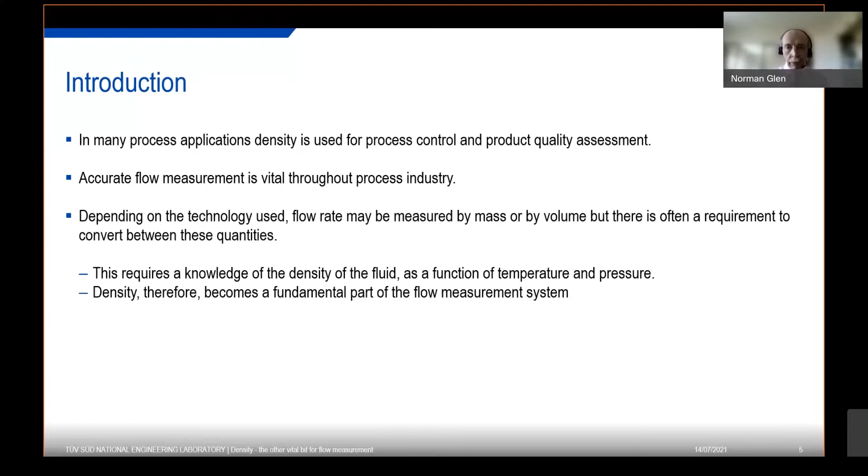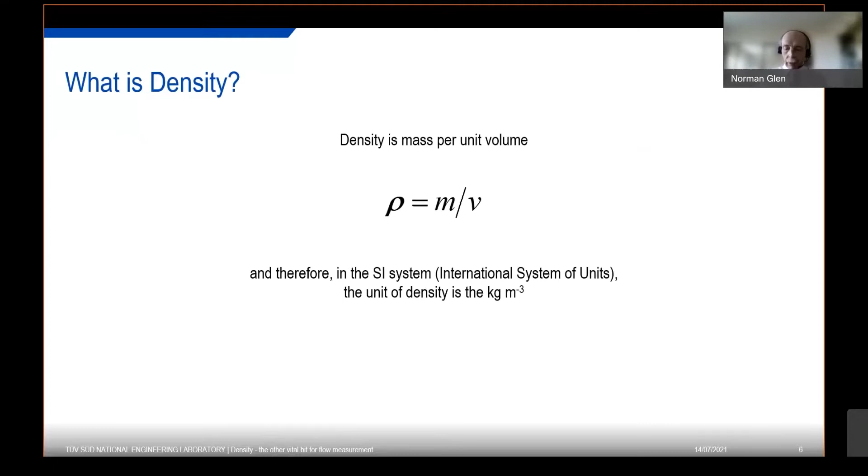You'll also see other types of density units measured frequently, particularly in the oil industry and in certain other applications, food and drink sector. Sometimes you'll see relative density or specific gravity. Specific gravity is usually oil related. Relative density - these are a density divided by the density of a reference, and the reference is at stated conditions. For liquids, the reference is often water at 1 bar and 4 Celsius. For air, for gases, it's often air at 1 bar, but at 0 Celsius.

And it's important to note that relative density is not a ratio of densities. A density ratio is the ratio of the density of the fluid at temperature and pressure to the density of the same fluid at reference conditions.

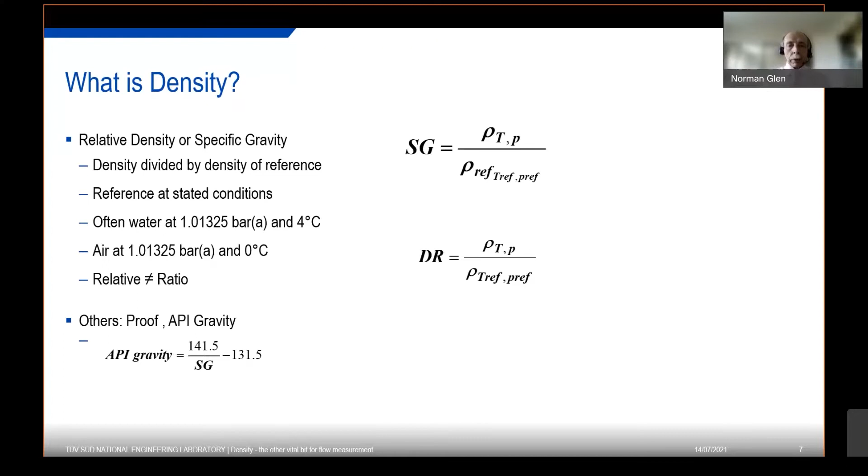So that's density, that's what density is. That's all well and good. How do we actually go about measuring the density of a fluid? So what I'm going to do over the next few slides is to have a look at a range of density measurement techniques, some of which are applicable to both gases and liquids, some of which are only applicable to liquids. And we'll look at the advantages and disadvantages of each of these techniques.

Before getting into the detail of techniques, it's worth doing a first split on them, saying we can think of them in two categories. We can think of offline methods, where we take a sample from the fluid, gas or liquid, and measure it separately in an offline device. Alternatively, there are online or inline methods, which may be either insertion or flow-through techniques, where the measurement is made effectively in the fluid that you're interested in.

That also leads us on to the question of calibration of all of these devices, either the offline methods or the online or inline methods, in particular if they are forming part of measurement systems, the other parts of which also require calibration.

So how do we measure density? The primary standard for flow, for example, is effectively a bucket and a stopwatch - a bit more sophisticated than that. The facilities at NEL have very, very low uncertainties, but the principle is that you have a vessel and you fill it with the fluid that you're interested in. You either weigh the vessel empty and filled, so you have a mass and a time, or you measure the change in volume of the liquid in the vessel, so you have a volume. So you can have a mass or a volumetric primary flow measurement.

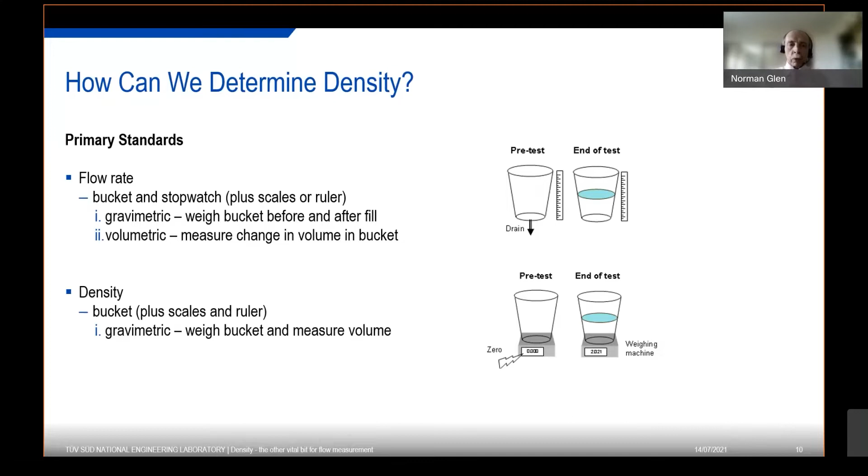In terms of the techniques that are available, I'm going to cover 5 techniques here, some of which are applicable to both gases and liquids, others of which are only applicable to liquids.

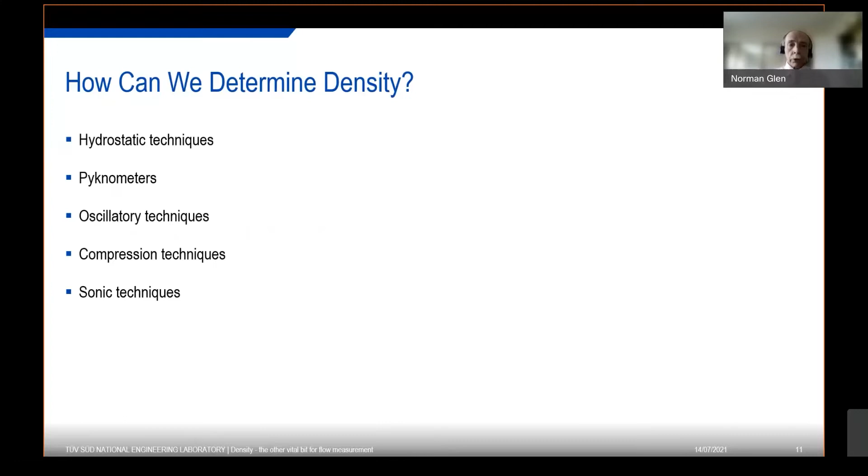Hydrostatic techniques are pretty close to what I was saying in terms of primary standard, in the sense that we are determining the apparent weight of a body of known mass and density totally submerged in the fluid whose density we want to measure - Archimedes' principle.

These can be broken down into broadly 3 implementations of the technique. A mechanical suspension system, where the body in the fluid is connected to a balance using a fine wire. Instead of the wire, you can have a magnetically coupled system, where you have a magnet and an electromagnet coupling the body to the balance. Or you can use a magnetic float system, where the body in the fluid is held in equilibrium by an electromagnetic field, and by controlling and measuring the field, you can effectively measure the apparent mass of the body in the fluid.

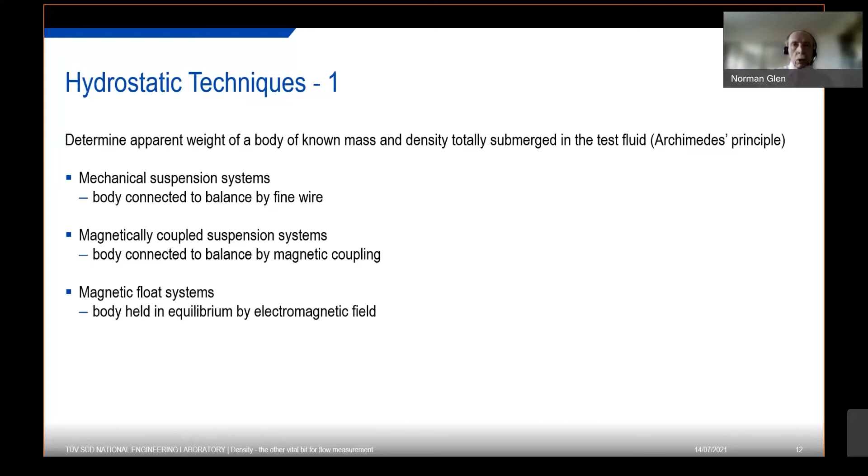What would one of these look like? Here's an example of a magnetically coupled system. We have our body immersed in the fluid, the sinker - quartz glass in this case - and a coupling system which transmits its apparent weight in the fluid through the wall of the enclosure to a balance.

The equation is very simple at its most basic: the density is given by the difference between the true vacuum weight of the body and its apparent weight in the fluid, divided by the volume of the body. In practice, you have to apply second-order corrections, but in principle it is that simple a technique, and therefore very close to the primary method for determining density.

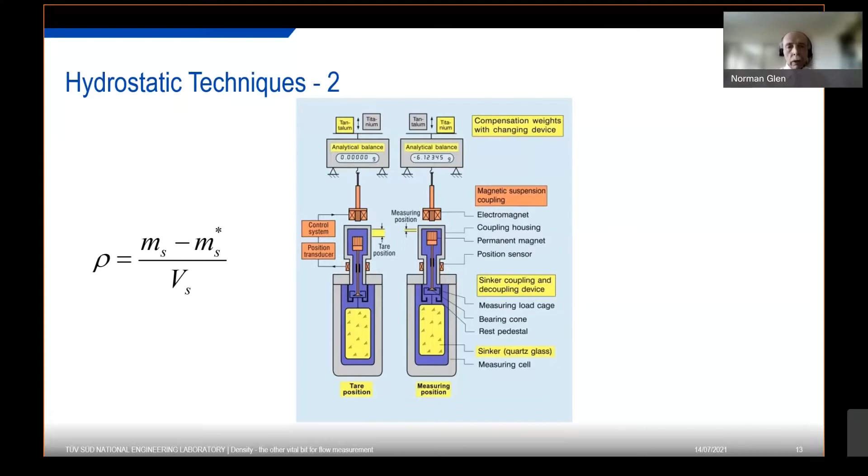Hydrostatic techniques have a number of advantages. Depending on the design and implementation, they can be automated, and they can be used over a wide temperature and pressure range. For example, the system we looked at in the previous slide has the whole system inside a pressure vessel, inside a thermostat, so you can work across an extended temperature and pressure range. And they can be very accurate - 0.02, or perhaps even better over limited ranges to 0.005. So they are essentially a primary standard method, and depending on the implementation, if it's a closed vessel arrangement, they can be used for gases and liquids.

Obviously, there are disadvantages. If you want to achieve those sort of uncertainties down at the 0.005% level, it needs careful design and careful operation. If it's not automated, then it's time-consuming to use to get to that level of performance. Conversely, automating it often means it's quite expensive, and they're really not suitable for online use - these are laboratory, near-primary-standard type devices.

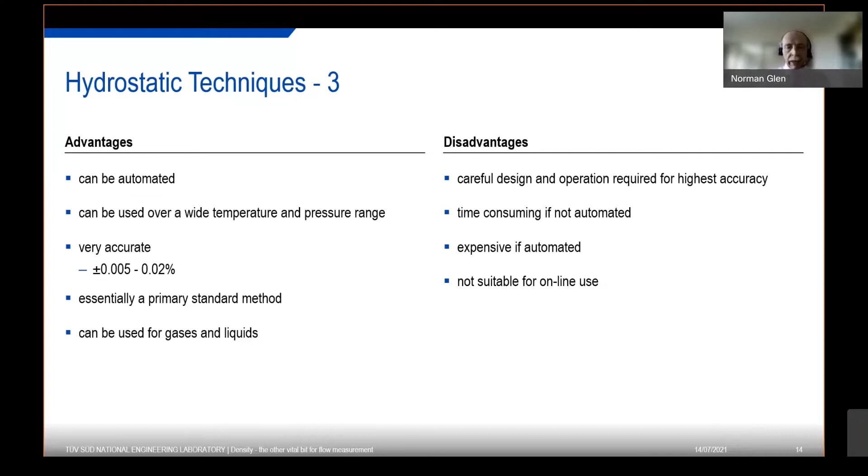Going to the other extreme, pyknometers measure the mass of a known volume of fluid. Again, we've got the two quantities we need to know for density: mass and volume. And again, there are various implementations of these.

We've got capillary stoppered pyknometers, where you compare masses of equal volumes of sample and water. Graduated bicapillary pyknometers, which are calibrated using water and have a scale that you read. Or pressure pyknometers, again often calibrated using water. The pressure pyknometer is essentially the closed vessel, pressure capable version of the capillary stoppered pyknometer.

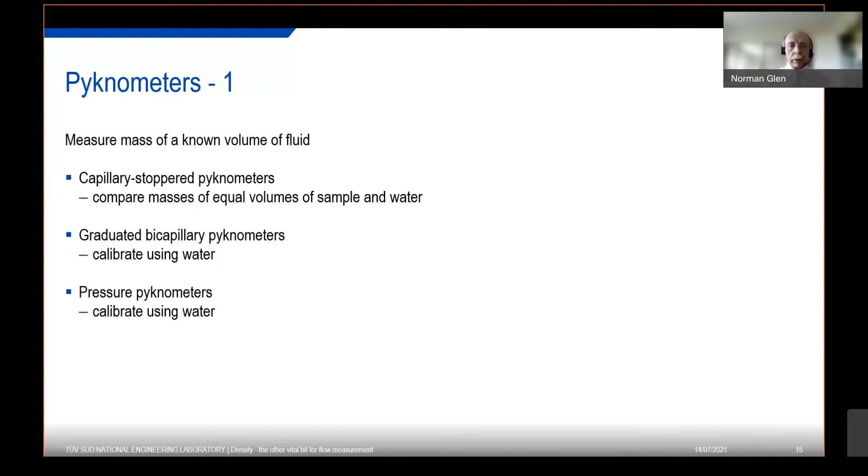So the capillary stoppered pyknometer on the left is a small glass vessel with a plug lid which has a capillary through it, hence the name. You fill the vessel, insert the stopper, and the capillary allows the fluid to flow over the top to a defined level. You can then weigh that with your reference fluid, water. Then you repeat with the fluid whose density you need to know. So you've measured two masses, you know the density of the reference mass, the water, and you can therefore calculate the density of your fluid of interest.

Graduated bicapillary pyknometers, as I mentioned, have a scale, again calibrated with water. For a pressure pyknometer, you would weigh the pyknometer empty and then fill it with the fluid, which may be a liquid or a gas, and then weigh again. So again, you have two measurements of a known reference, water, usually.

You get a theme here. Water is coming up as the reference fluid in a lot of these situations, even when we're potentially measuring other fluids. The reason is that we know the density of water very accurately across a very wide range of temperature and pressure conditions, so it makes a very good reference fluid from that point of view. It has one or two other problems, particularly things like capillary effects, and also getting it back out of vessels can be quite difficult, but it has that very well characterized density as a function of temperature and pressure that we need for a reference fluid.

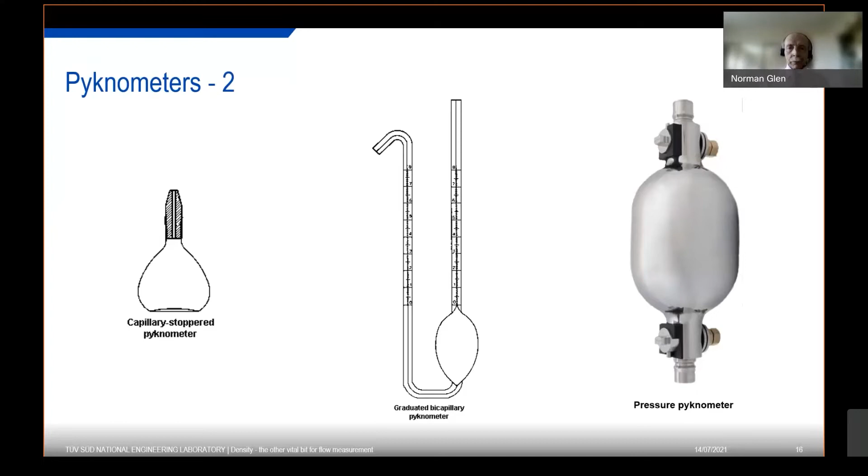Pyknometers are fairly fundamental. They are very simple devices, and therefore they tend to be fairly cheap to purchase. They can provide what I would class as good to reasonably high accuracy, possibly even down to 0.01%. Depending on the design, they can be used for gases as well as liquids if it's a pressure pyknometer. But to achieve those sort of levels, to get down below 0.1%, does require careful operation, and generally, if that's manual, it comes down to having a very skilled operator.

Also, if you're trying to do that, it tends to be time consuming if it's not automated. Again, like the hydrostatic techniques, they can be automated, but that obviously increases the cost, so you lose the advantage of them being cheap to purchase. And they're not suitable for online use. Pressure pyknometers are a hybrid in that you are taking a sample off and then measuring post the measurement, so it's not an online technique in that sense.

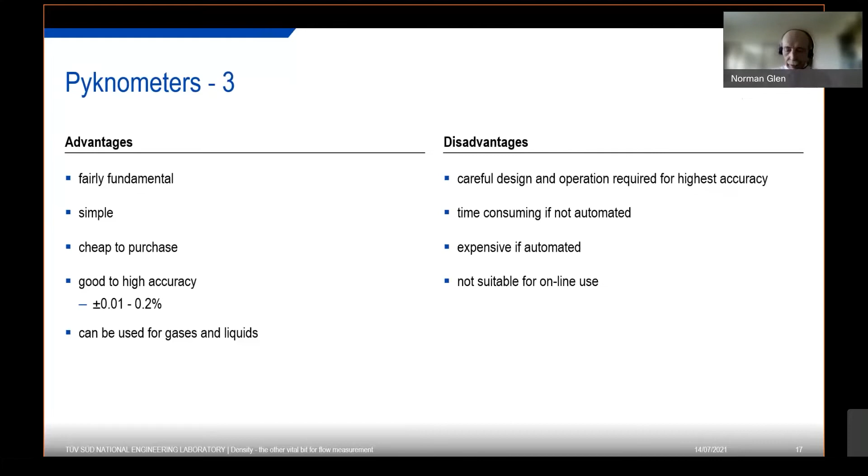So what can we use if we need to measure online? Well, oscillatory techniques are probably the most widely used way of doing online density measurement. There you measure the oscillation period of a body, either immersed in the fluid or filled with the fluid. If filled with the fluid, it would be a vibrating tube where you measure the typically transverse oscillation period of the tube. That changes as a function of the density of the fluid, because you're effectively changing the mass of the vibrating tube and fluid.

Or you can have an insertion type where you have a rod or a tuning fork immersed in the fluid, but again, in this case, the period of oscillation will also change as the density of the fluid changes.

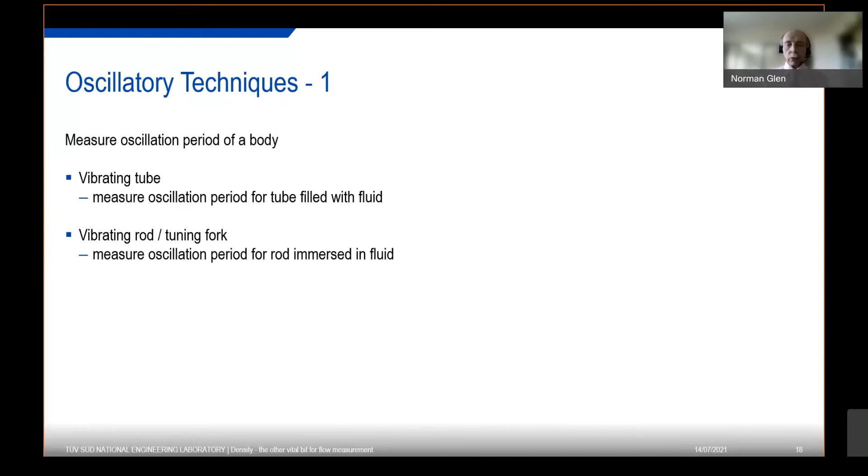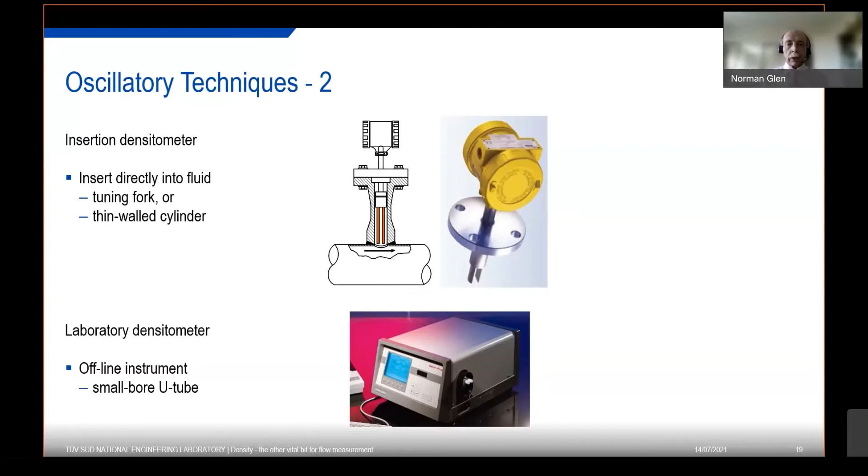Insertion densitometers can be used for liquids or gases and are either inserted directly into the fluid or perhaps in a side stream or in a pocket, as shown here. As I've mentioned, they would either be a tuning fork design, such as the one on the top right there, or a thin-walled cylinder. Laboratory instruments most commonly tend to be small bore U-tube, but the principle is exactly the same: you're measuring the period of oscillation, which will change as a function of the density of the fluid.

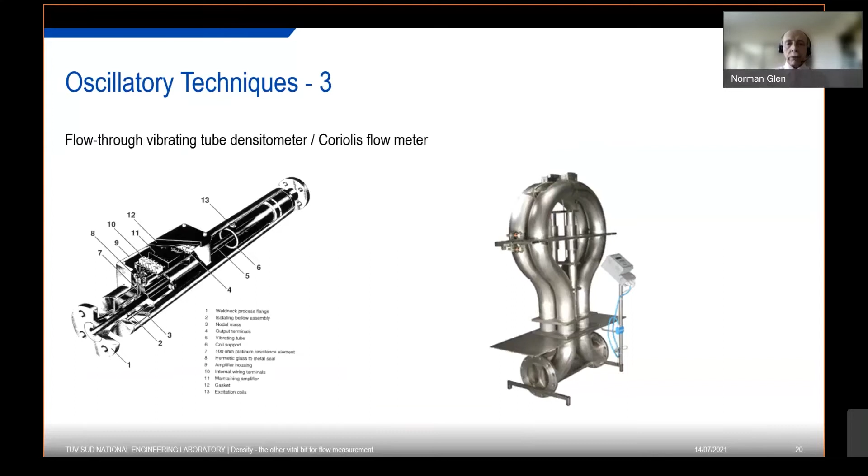Flow-through devices are either dedicated flow-through vibrating tube densitometers or Coriolis meters. All modern Coriolis meters have density as their secondary output, so you get a measurement of mass flow and also density. But again, it's the variation of the period of oscillation with the density.

Oscillatory techniques do have a number of advantages. In principle, they are simple and easily automated. Depending on the design, they can be used over wide ranges of temperatures and pressures, up to very high pressures, down to very low temperatures. And they can be used in line, which is really their big advantage for process and measurement system applications. They are commercially available in a whole variety of formats to suit different requirements. They can potentially be very accurate, certainly easily better than 0.1 down to 0.02 for certain types and applications, and depending on the design, they can be used for both gases and liquids.

All of that comes with some disadvantages, the most obvious being they tend to be more expensive than things like pyknometers. But you get all of those advantages, particularly the online or inline use. However, they do require careful calibration, if you're going to try to achieve those low uncertainties in use.

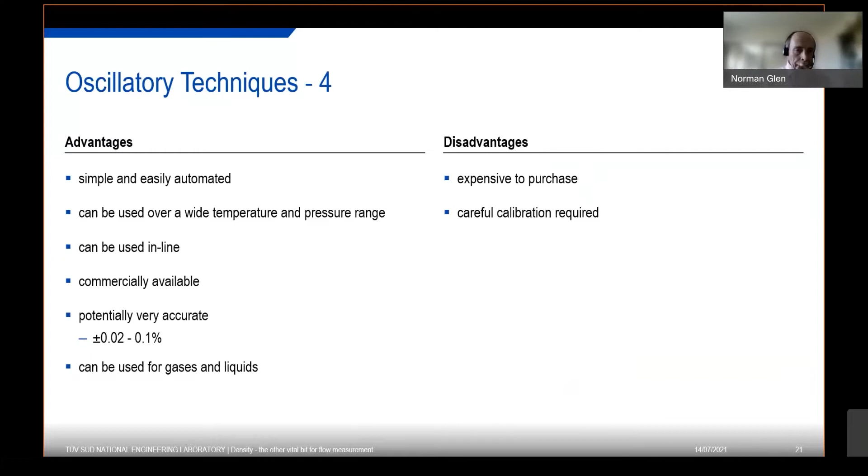A couple of other techniques to look at: compression techniques, where we measure the change in length of the fluid. That can be done in a number of ways. It can be a capillary rise, where you measure the change of height of a liquid in a capillary tube - only applicable to liquids. Or you can use piston displacement, where you measure the displacement or change in position of a piston in a pressure vessel, which you can apply to liquids at pressure.

Similarly, a sealed bellows approach, where you fill a bellows with the fluid whose density you want to know. You know the mass of the fluid, and you can measure the change in length as a function of pressure or temperature. So these techniques are only suitable for liquids.

Sonic techniques measure the speed of sound in a fluid. You can either use an interferometer with a variable path length, which detects the impedance of the vibrating crystal as a function of the speed of sound, or an optical diffraction technique, which measures the diffraction of a light beam through the density variations caused by the sound wave. There is a fundamental thermodynamic relationship between density and speed of sound, so you're measuring speed of sound but can relate that to density. These techniques can be used for gases and liquids.

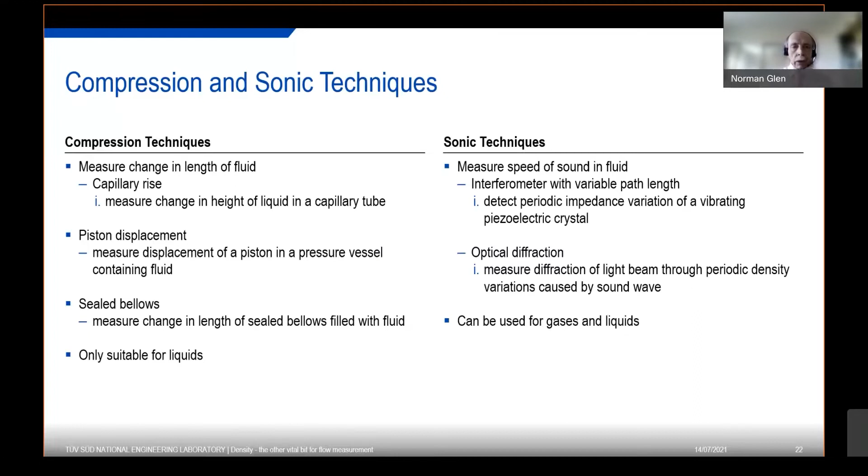So we've seen a range of techniques which can be used to measure the density of gases and liquids. For general lab and process applications, oscillatory techniques are the most widely used and the ones you're most likely to come across as a user. The other techniques, particularly hydrostatic weighing techniques, tend to be the preserve of primary standards laboratories or research groups.

It's also worth pointing out that although I mentioned some of these systems can be fairly expensive, while that implies high accuracy will generally mean high cost for the equipment, the converse is not necessarily true. Simply because a device has low accuracy doesn't necessarily mean it has low cost. It might just not be a good implementation, or even the appropriate method for the system you're interested in.

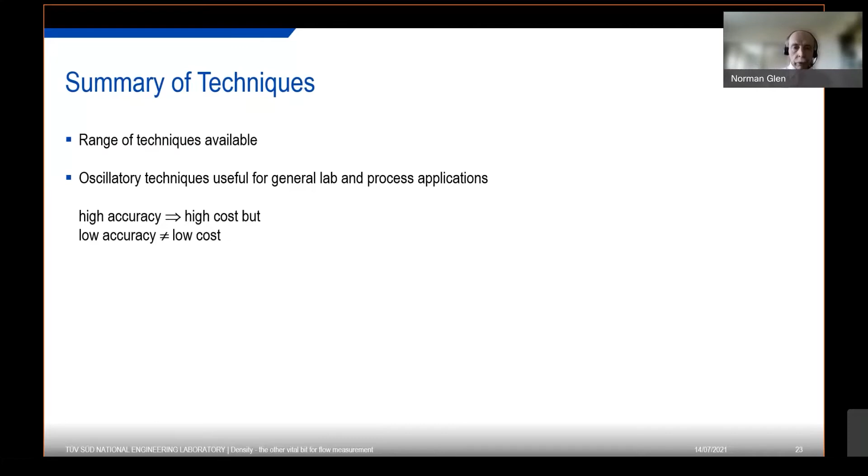I mentioned earlier that particularly for online or inline densitometers forming part of a measurement system, calibration is important, because recalibration at appropriate intervals is vital for maintaining traceability. These calibration requirements are often driven by regulations. Equally, the calibrations must be fit for purpose, and I'll explain more about what I mean by that as we go through this section.

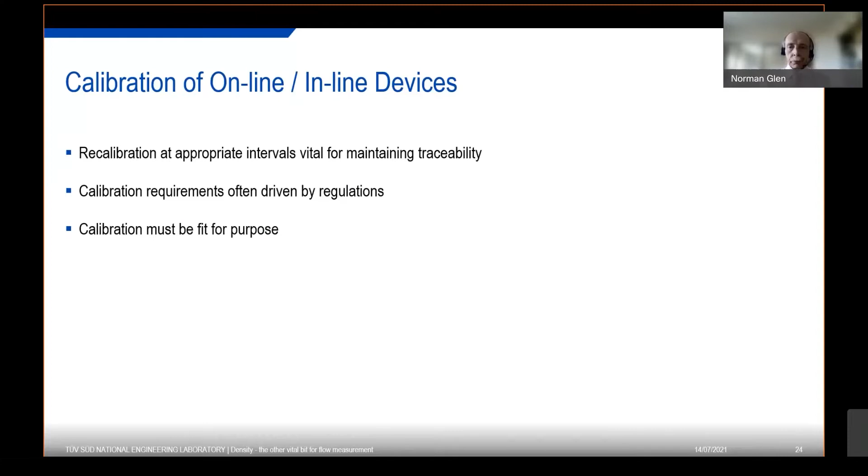As I said, the requirements are often driven by legislation. In the UK, for liquid measurement systems for petroleum, the requirements from the OGA, the Oil and Gas Authority, specify an uncertainty of 0.25% by dry mass of the quantity exported into common transportation systems like pipelines.

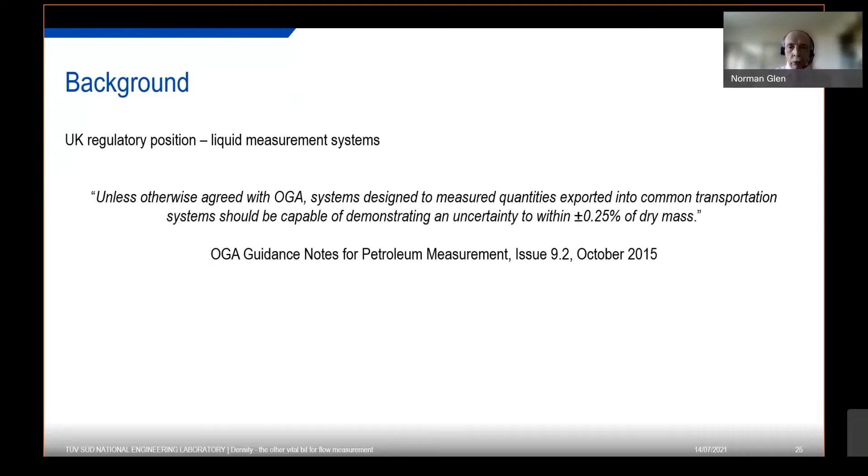Now, although it is changing, a significant number of liquid measurement systems in the North Sea still make use of volumetric flow meters. The original installations used turbine flow meters because they were the best available at the time, and they're volumetric. But you have to report your production by mass, and allocation in shared transportation systems is also by mass. So fluid density is required to convert from the volumetric output of the flow meter to the mass required by the regulator or pipeline.

The most commonly used technique are vibrating tube densitometers. But if they're forming part of the measurement system to achieve that 0.25% specified by OGA, traceable calibration of the densitometers as well as the flow meters is therefore also required.

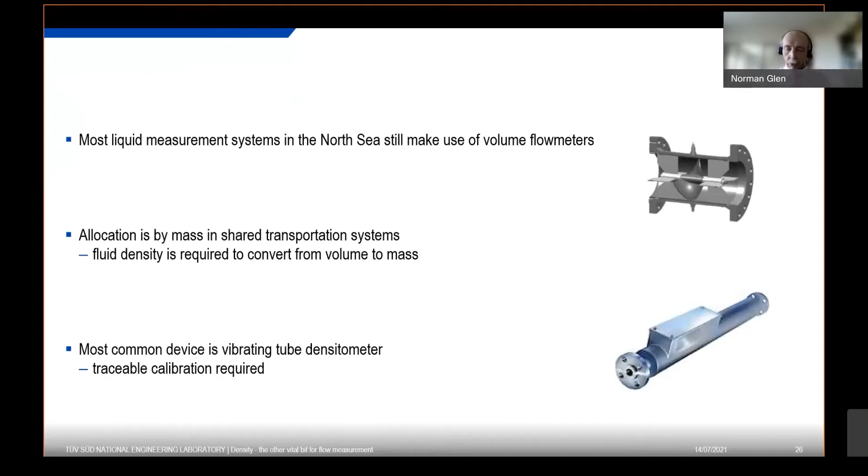Fit for purpose. Well, let's take a step back.

The previous approach in this area was that the manufacturer would undertake an initial calibration of the densitometer, typically at ambient conditions, i.e. 20 Celsius and 1 bar, and then derive corrections for other temperatures by making measurements at 1 bar at other temperatures, and pressure corrections by making measurements at other pressures at 20 degrees, but not simultaneously.

Recalibrations, particularly if done by third-party laboratories, were typically only done at 20 degrees and 1 bar, assuming that none of the pressure or temperature coefficient effects had changed. But of course, densitometers are used at non-ambient conditions, and the equation used for the most common ones is cross-coupled in the period, the output of the densitometer, the temperature, and the pressure.

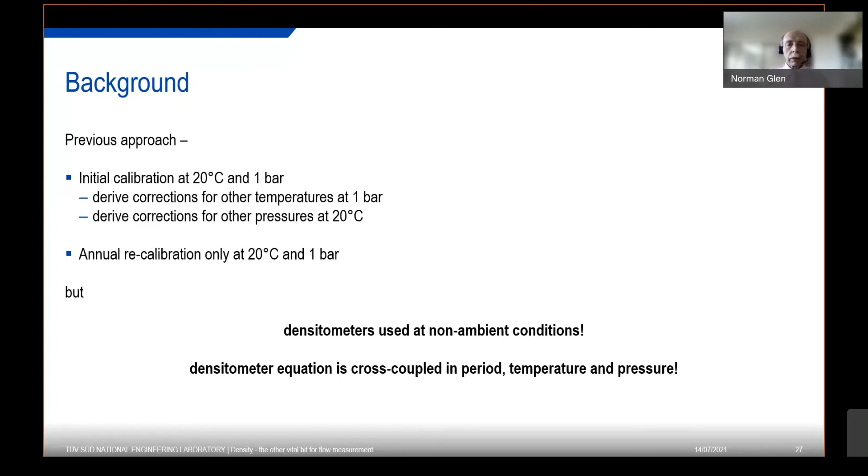This led to some concerns about the appropriateness, the fitness for purpose, of the previous calibration approach. As a result, NEL led a joint industry project to examine the effects of temperature and pressure cross-coupling on liquid densitometers for the UK sector of the North Sea.

Following that, OGA, as it is now, changed its guidance and requires densitometers to be calibrated at their anticipated operating conditions, i.e. simultaneously at temperature and pressure, so ensuring the calibration is fit for purpose.

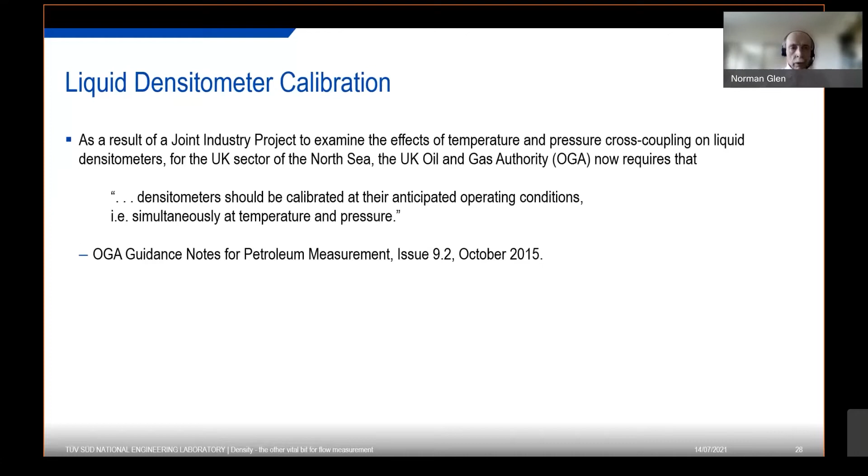So how do you calibrate a densitometer? Well, again, like all of these things, in principle it's simple. You use fluids of accurately known density. The fluids, of course, have to cover the full operational density range that the device will see in service. The fluids probably also have to cover other relevant parameters, in particular viscosity and speed of sound, since these are admittedly second-order effects on oscillatory densitometers.

And the fluid properties obviously must be known across the full temperature range and pressure range required, because the fluids are acting as your transfer standards.

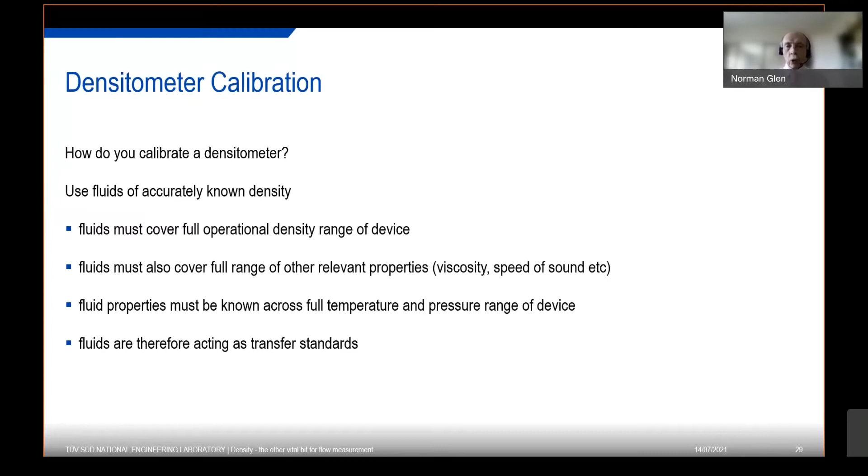So at the start of the JIP, we asked the sponsors, okay, what sort of range of conditions, in particular for density and viscosity, do we need to cover for the North Sea? You can see here that the full range went down to about 530 odd kilograms per cubic meter, which will be condensate type applications, up to almost 1200 kilogram per cubic meter, so high viscosity heavy oil, and corresponding viscosity ranges from centipoise or below up into the 40 plus centipoise for the high viscosity oils.

But the most common range was a much smaller subset of that. So what we tried to do was find reference fluids which would basically bracket that common range.

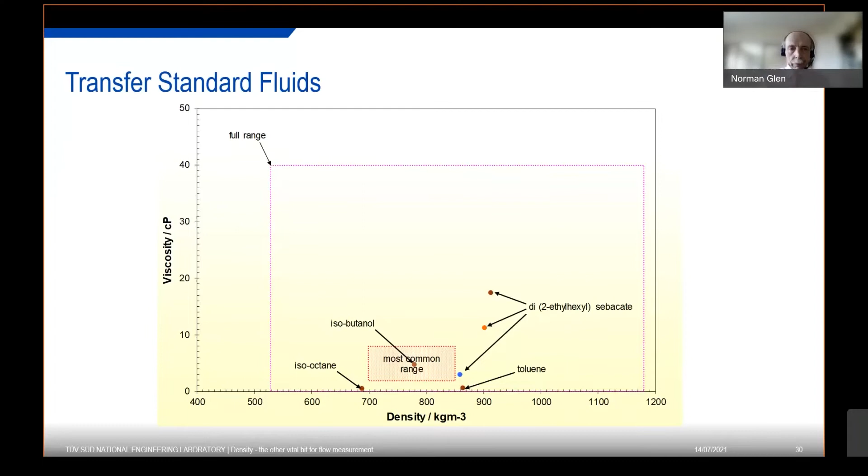Once we had identified fluids, we then had to determine their density as a function of temperature and pressure across the required range. To do that, we used the NEL primary liquid densitometer. This is the one we saw earlier. It's a single sinker magnetic suspension densitometer. We've seen that equation before, based on Archimedes' buoyancy principle.

Our particular implementation can achieve an expanded uncertainty of better than 0.015% at 95% confidence across the temperature range from -40 up to 150 at pressures up to 300 bar. Across more limited temperature and pressure ranges, the uncertainty is 0.01% or slightly lower.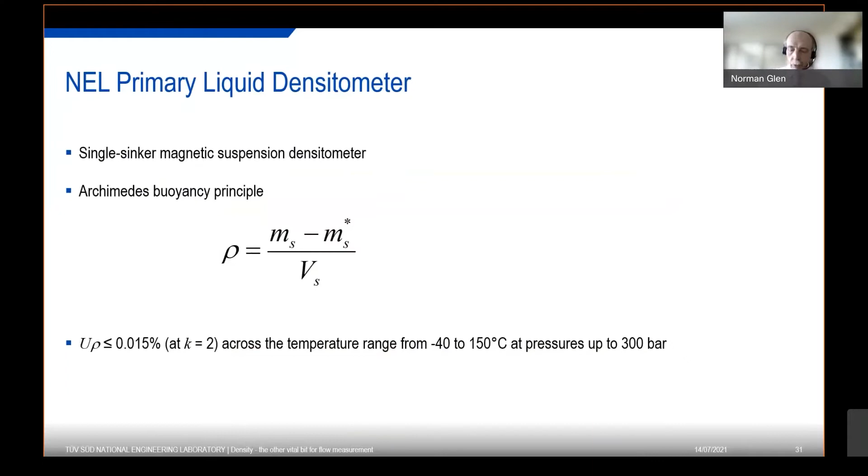Here we can see it in a bit more detail. Previously we just saw the little bit showing the sinker in its measuring cell. That's a pressure vessel, which in turn is sitting inside a thermostated vessel. So we can control both the temperature and the pressure of the fluid that we're interested in measuring the density of by measuring the apparent weight of the sinker. And the apparent weight of the sinker is read by the analytical balance, coupled through the wall of the pressure vessel by a magnetic suspension coupling system.

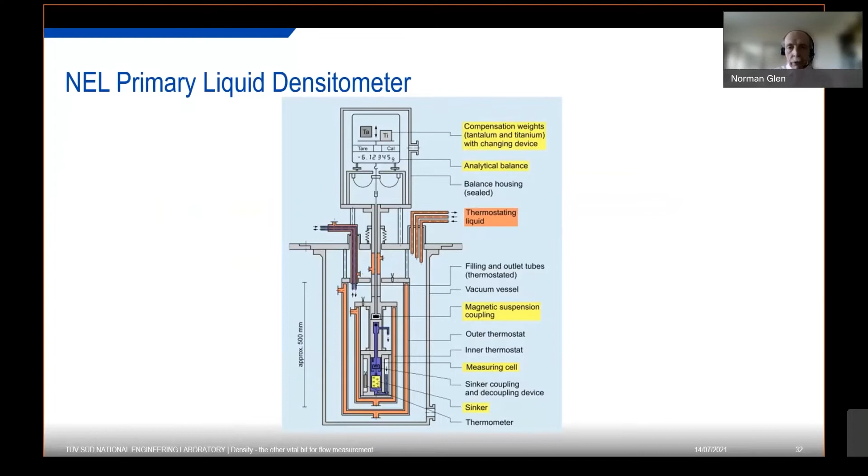That's all well and good. How does it perform? Here's three sets of data from measurements made using the system during the joint industry project. The measurements were made on three separate samples of reference fluid from different batches of the sample from the supplier. They were made across the period between August 2007 and September 2008, so quite a time difference between them.

I've just picked the data at 20 and 100 Celsius here as the extremes of the range. You can see that the agreement between the three sets of measurements is very good. It's generally within plus or minus 0.005% or better.

Okay, so the system's self-consistent, but we could have some bias in there that we haven't noticed. How do we deal with that? Well, by looking at measurements made by other people using other systems.

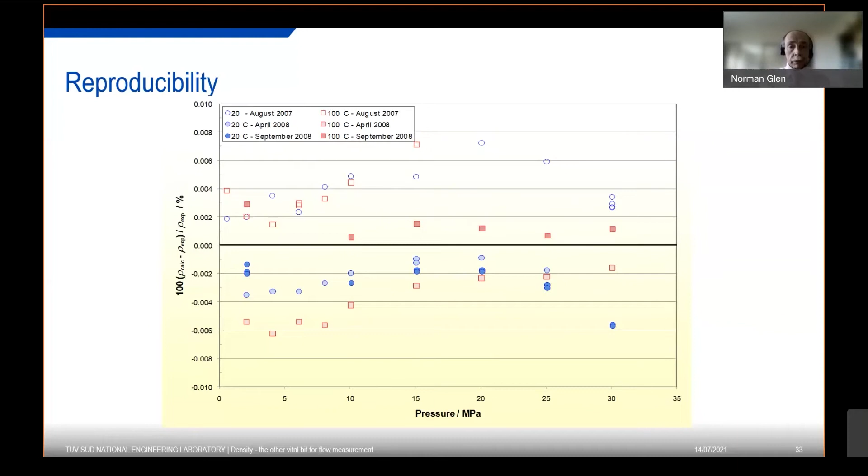Here's a couple of sets of data comparing measurements from PTB, the German standards body, and the corresponding US one, NIST, National Institute of Standards and Technology. You can see that the agreement between the NEL and PTB measurements looks very, very good, which possibly isn't surprising in one sense, in that both systems were of the same design.

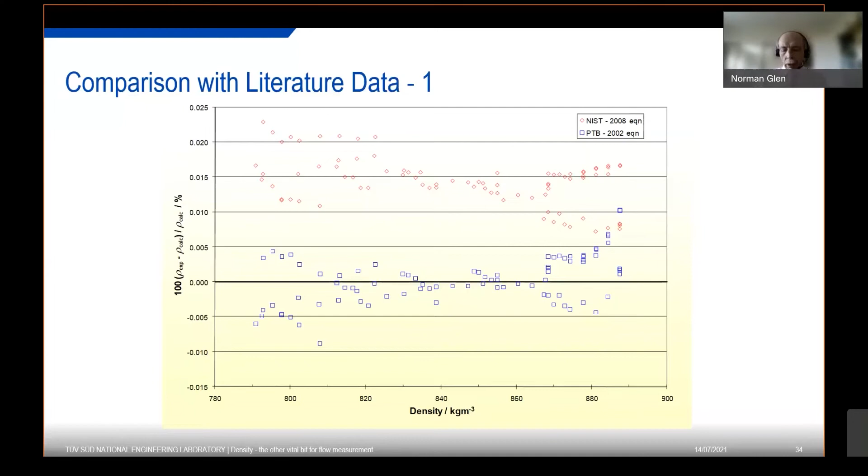The results, the comparison to the NIST data look a bit further off, and I was initially a little bit concerned about that. But when I looked in more detail at the NIST data, I found that those headline figures we looked at on the previous page actually consisted of 3 sets of measurements from NIST: one was their standard reference material, which is what they normally supply to customers; one was an air saturated sample; and one was degassed.

You can see that the difference is biggest for the air saturated and least for the degassed. Our system is effectively running degassed, so the measurements are close. We're generally within plus or minus 0.008%. There's a slight temperature effect, but much better than just the headline figure. So that gave us confidence that our reference measurements were good.

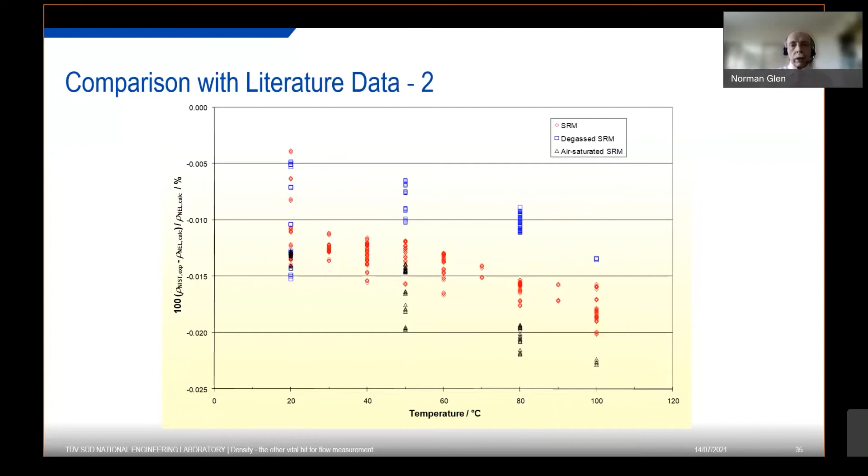That means we can move to the next stage: fill a densitometer with 2 or more of these fluids, control the temperature and pressure of the fluids, and measure the output period. How good do we have to control it?

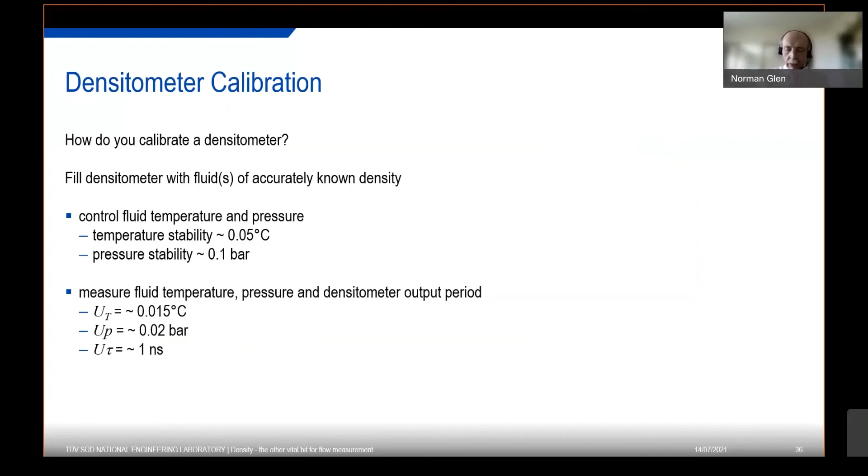Well, temperature stability about 50 millikelvin, pressure stability about 100 millibar. Then measure the temperature with an uncertainty of about 15 millikelvin, ideally, and measure the pressure with an uncertainty of about 20 millibar. Because of the temperature and pressure stability, the output period should be stable in the nanosecond type range, and measuring periods to that uncertainty is easy.

What does it look like in practice? Our system has an enclosure. The photo on the left shows a typical densitometer installed in the enclosure. The schematic on the right shows that we have a fan and a temperature control system below with which we can control the temperature of the air in the enclosure.

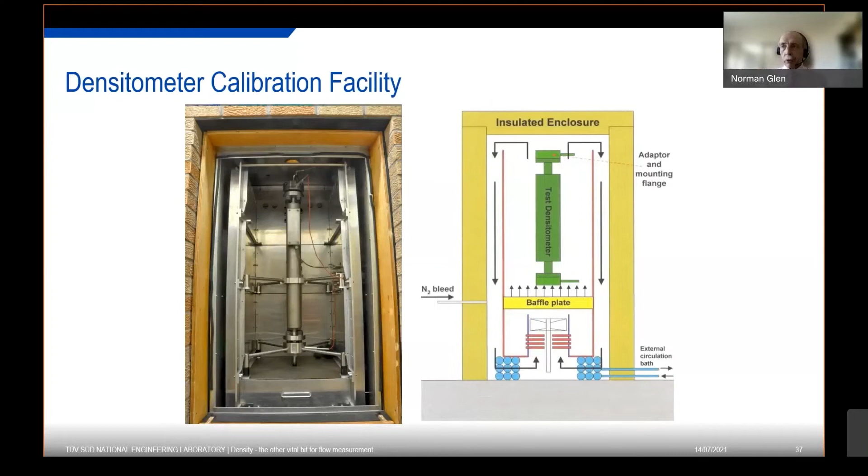Separately, we have a circulating loop whereby we can control the temperature of the fluid in the densitometer as it flows round. We need to control both the air temperature round the densitometer and the fluid temperature to achieve those low uncertainties in temperature that I mentioned earlier. If we didn't control the air temperature when running at high fluid temperatures, you would have an unacceptable temperature gradient across the densitometer.

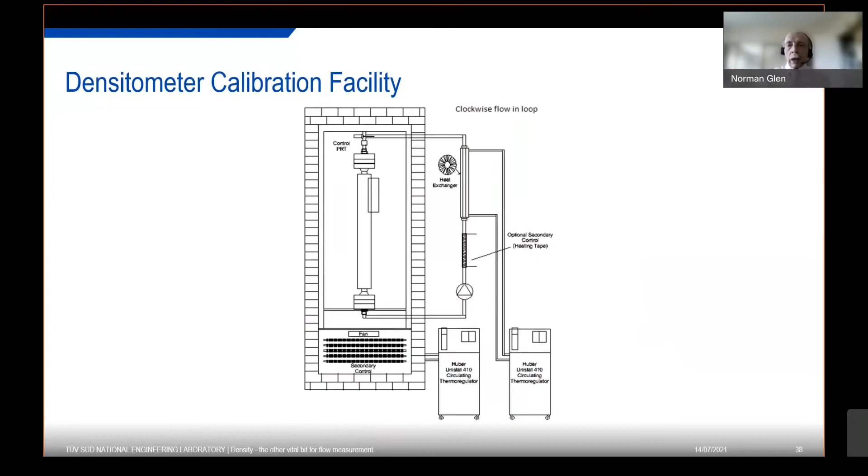Obviously, we can actually look at that in more detail and look at the uncertainties. Here's an example from our top level uncertainty budget for the facility. Just picked a set of conditions here: running with a fluid temperature of 90 Celsius at 90 bar gauge, 91 bar absolute.

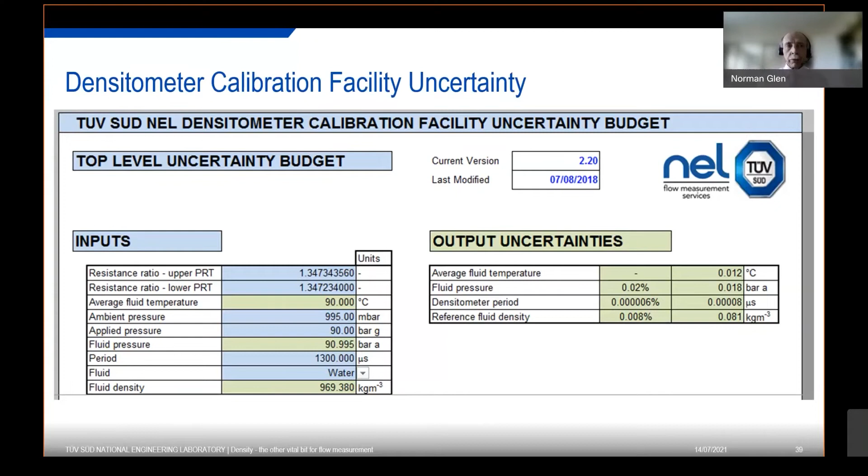You can see that on the basis of our measurement capabilities, we're achieving our targets. Our temperature uncertainty is 12 millikelvin, uncertainty in the pressure is 20 millibar. Densitometer period uncertainty is down in the fractions of a nanosecond, as I mentioned. And the reference fluid density is below 0.01% here. So we will have good confidence that we're seeing the performance of the instrument when we look at it.

Following on from the JIP, we started a calibration service, and since then we've calibrated almost 750 of the 7835 series densitometers, which are still the most commonly used type in the UK sector of the North Sea. These have been calibrated to the current OGA guidelines. Operating conditions for these units we've seen ranging from 5 Celsius up to 95 Celsius, and pressures from 5 bar or even lower, 3 bar, up to 130, 131 bar A.

Initially, what we found was that about half, so for about the first couple of years, about half of the units coming to us had as-found errors of between -0.1 and +0.1%. But just stating that headline figure kind of masks the scale of the problem, because whilst about 15% had negative errors more than -0.1, about half actually had positive errors over 0.1, i.e. a significant number were overreading by a significant amount. Over the years, that has reduced as the calibrations have improved to become more fit for purpose, from ourselves and from other calibration laboratories.

Interestingly, there was no clear correlation between the as-found error and operating temperature and pressure, which had been one of the things that had triggered the JIP in the first place. But what we also found was that just adjusting the base coefficients as per the previous procedure often wasn't good enough. Many of the units still had significant residual errors, so it was necessary to optimize more of the coefficients across a limited operating range to get down to the low uncertainties.

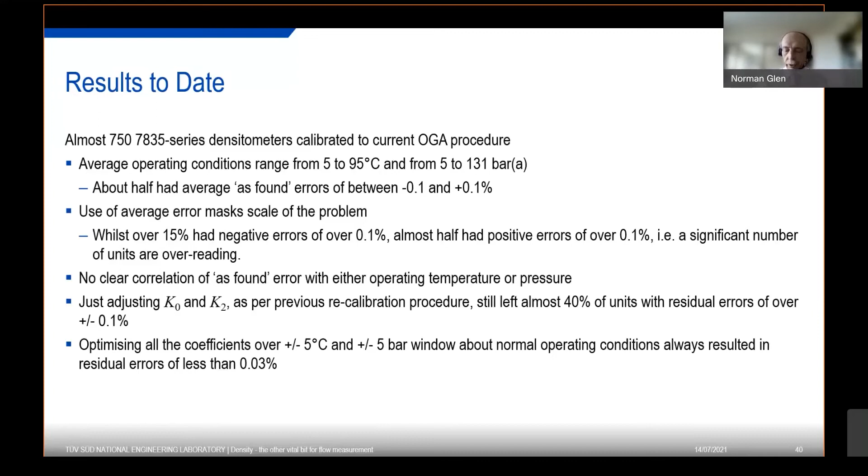Okay, so we've looked at measurement techniques, but in a kind of abstract way. What happens when you're actually doing it in practice? There are other considerations and other things that might affect the performance of your measurement system, even a well-calibrated one.

Potential sources of error would include non-representative samples, if you're actually taking a sample offline. If it's an inline or online system, if you have inhomogeneity of the sample in the sensor, gravitational settling perhaps of two fluids of very different density, solid deposition onto a sensor, an inline or online sensor, or conversely erosion, because deposition and erosion will alter the oscillating mass, which will therefore alter the apparent density. If it's a liquid we're looking at, if you've got gas breakout, then again that will cause a problem for the measurement.

Stress effects - these are oscillatory systems. If they are subject to stress, either in use, perhaps by an excessive pressure event, or stress when taken out of use by mishandling or damage, that will affect their pressure and temperature dependence. And if it's part of a measurement system, then temperature and pressure differences between the densitometer and the flow meter will also have an effect.

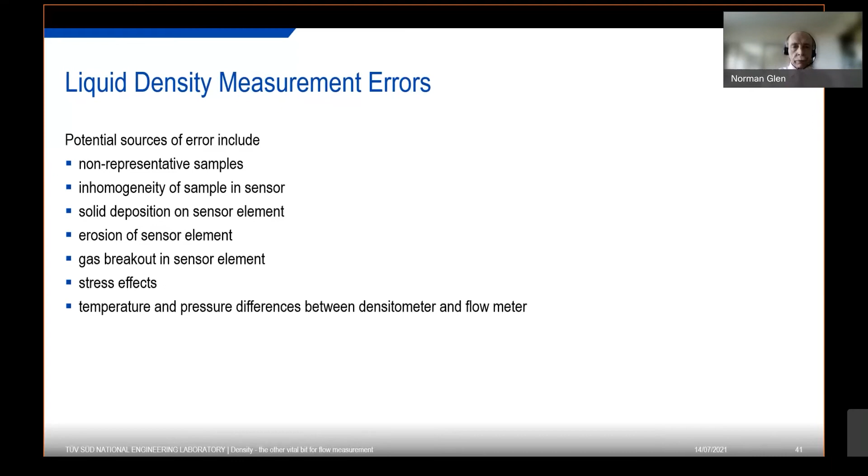So that's measurement. Let's have a quick look at calculation. Specifically, we're looking here in terms of the oil industry, because crude oil and petroleum products are typically sold by volume at reference conditions. The reference conditions are either 60 degrees Fahrenheit and 0 psi gauge for imperial, or 15 Celsius and 101.325 kPa for metric. So the effects of temperature and pressure on the fluid density are required to convert from the measured conditions to the reference conditions.

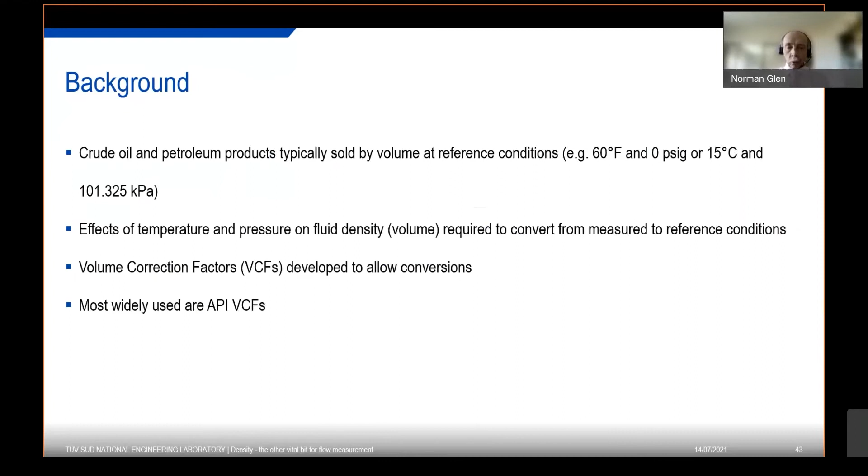This is usually done using things called volume correction factors, which have been developed to simplify that calculation. The most widely used are the ones developed by and maintained by the American Petroleum Institute, and they've got a fair history. The most widely recognized starting point were the 1952 Blue Book tables. They were then revised in 1980, and then again in 2004 as part of the Chapter 11 measurement series.

The 52 Blue Book was called the Blue Book for a very obvious reason - it had a blue cover, and it was actually a joint publication between the American Society for Testing of Materials and the UK Institute for Petroleum. Interestingly, although it was published in 1952, a lot of the data in it were based on crudes and fractions published in 1916, most of which were primarily from UK and US domestic production at that time.

The 1980 revision had some improvements, better base data in particular, and data handling in terms of the database. It covered just over 65% of worldwide production and about 68% of estimated reserves in 1974 - so a bit of a lag, but not as bad as between 1916 and the 52 Blue Book. Again, better handling of the data - the tables were replaced by equations, and there were also statistical studies carried out to check the data.

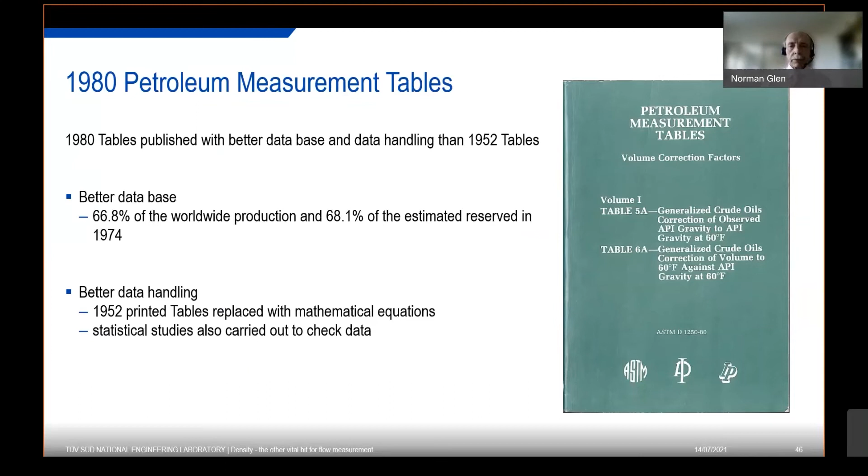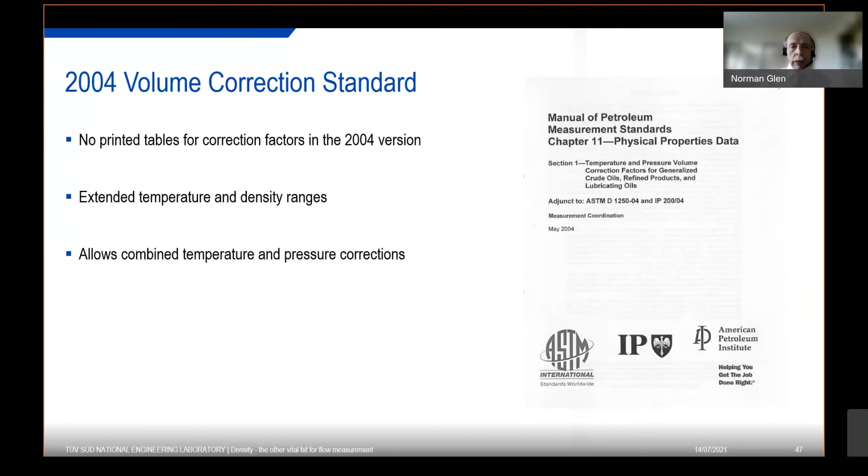The 2004 correction did away with the printed tables completely. It extended the temperature and density ranges and introduced the use of combined temperature and pressure corrections. And as I mentioned, they're widely used in trade applications, but they can also be used in things like provers, where you need to convert between a volume in a volumetric prover and mass if you're calibrating or proving a mass flow device.

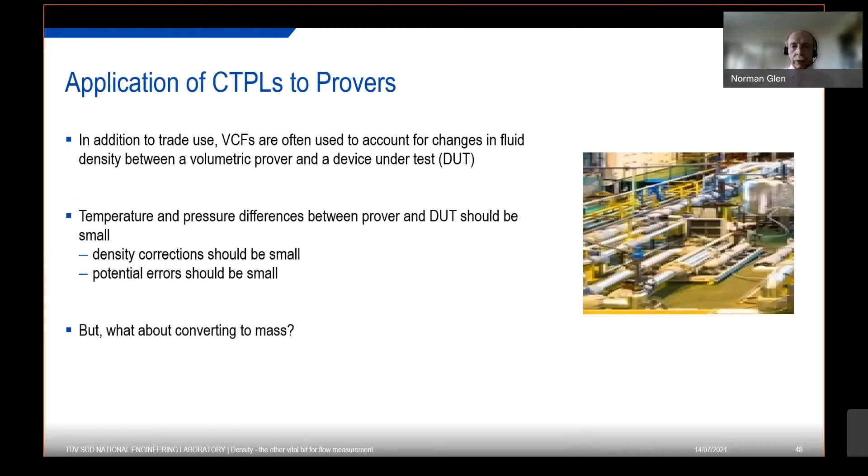So again, as I mentioned, for densitometers, you really want a small temperature and pressure difference between the prover and the device you're testing. But even if you achieve that, how do you convert from the volume from your volumetric prover to your mass? You do it using the conversion factors. So we've got an equation here relating the base prover volume, a reference, through to the quantity we're interested in, the mass, which makes use of these conversion factors. There's also a couple of other terms in there to account for the effect of temperature and pressure on the volume of the reference.

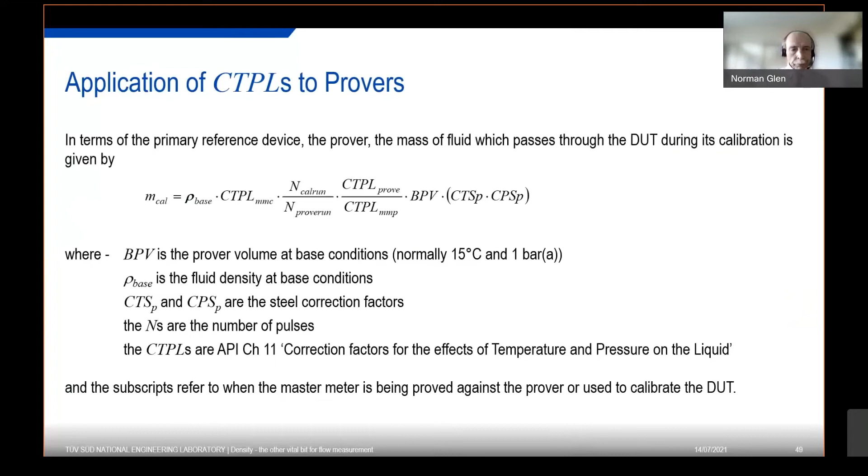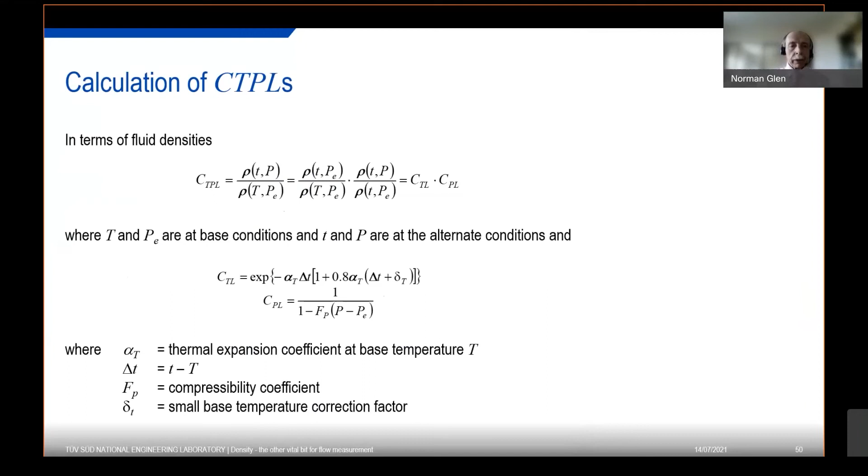So that can also be written in terms of fluid densities, and the fluid densities can be expressed in terms of these volume correction factors. In the case of the temperature correction, we have a thermal expansion coefficient term and temperature differences. For the compressibility term, we have a compressibility coefficient.

The thermal expansion and compressibility coefficients were correlated in terms of base density for the oil samples in the Blue Book tables, the 1980 revisions, etc. So there's an expression there for the thermal expansion coefficient with a series of coefficients, and there are several coefficients depending on the liquid's classification and its density at the reference temperature. The compressibility equation has one set of coefficients for all fluids, regardless of their classification.

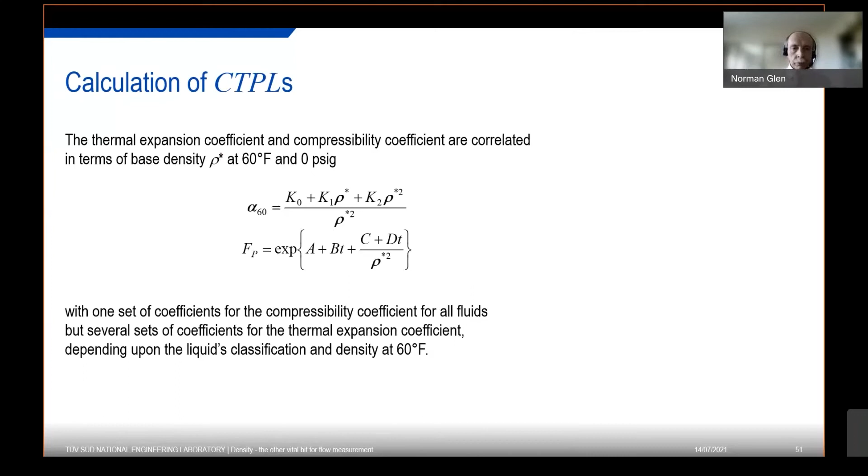In terms of the temperature classification, the Chapter 11 classification has three categories: crude oils, refined products, or lubricating oils. There is an additional special application if none of the above apply, and that requires a knowledge of the thermal expansion coefficient determined by experiment.

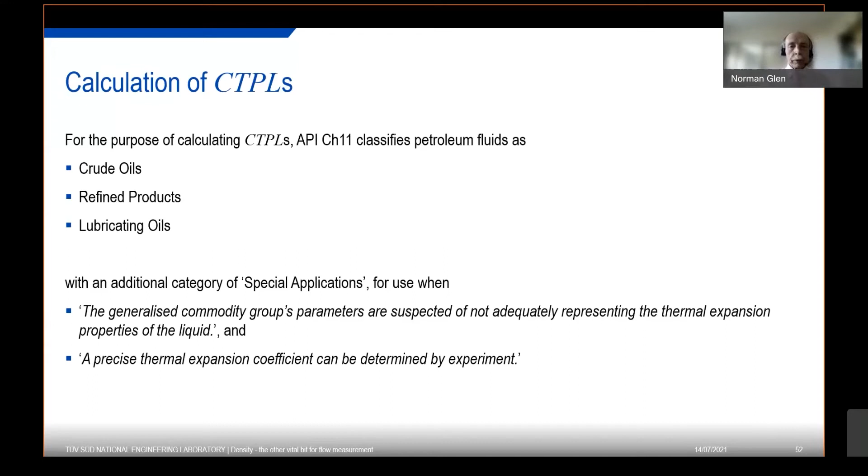Just out of interest, we decided to have a look at how good they were in relation to our EPAT facility, our elevated temperature and pressure facility at NEL, which uses a compact prover as its reference, but calibrates Coriolis meters, so mass flow devices. So looking at one of the oils that we use in that facility, we modeled it using the conversion factors, treating it first as a generalized crude.

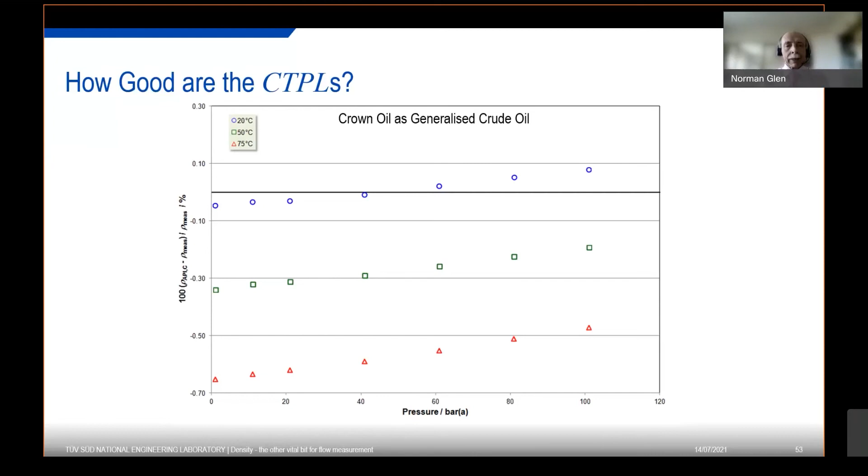And you can see at 20 Celsius, it doesn't look too bad across the pressure range, between minus 0.05 and plus 0.08%. By the time you get to 50 degrees, the errors are getting a bit bigger, and by the time you get to 75 degrees, you're up or down to minus 0.7 or so. EPAT can operate to that temperature, so treating it as a generalized crude doesn't work.

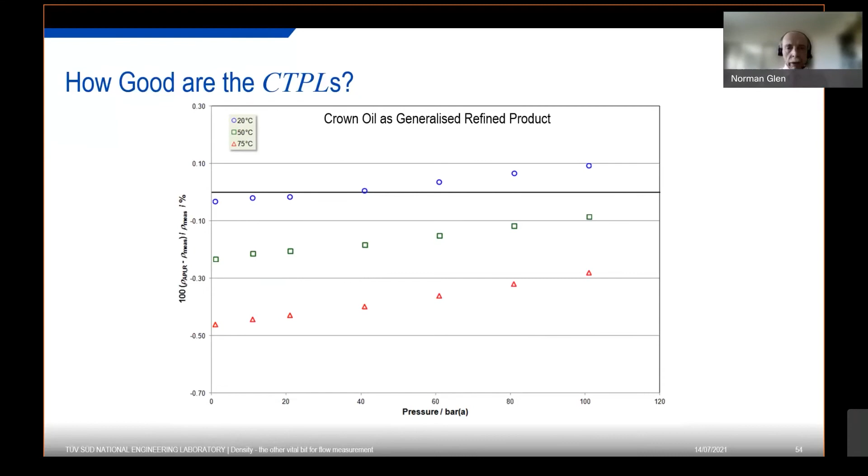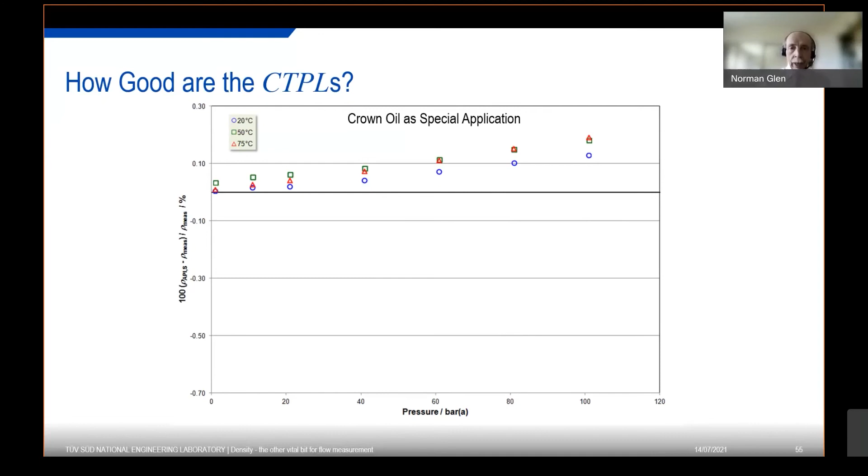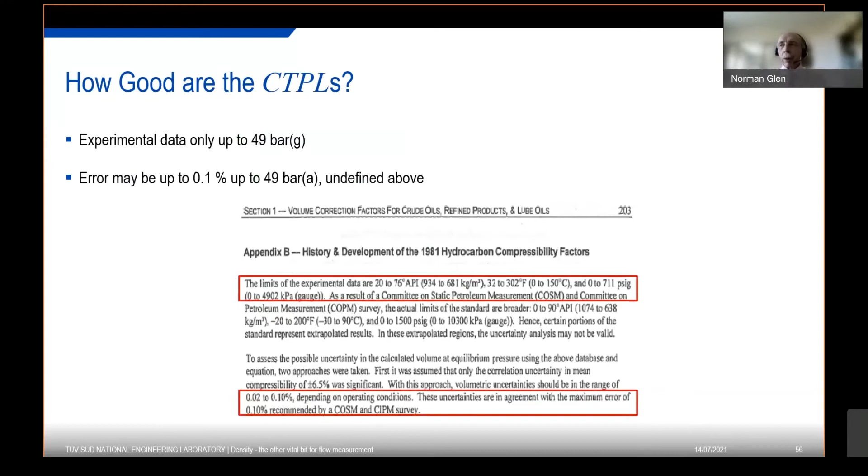It's actually not surprising that they struggle there, because if you look in the standard, the Chapter 11, buried in Appendix B, there's a little bit which says that the limits were only up to 49 bar for the pressure data, and it was extrapolated beyond that. So that kind of says, well, can we do better?

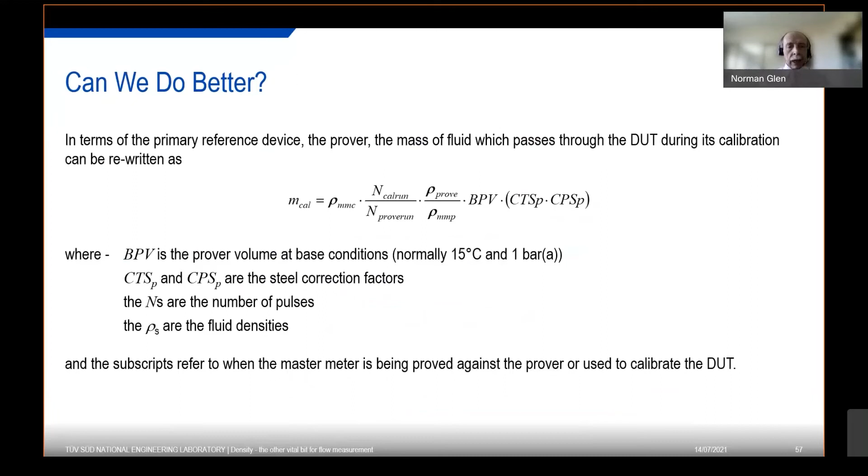Yes, we can, if we write it in terms of density, and we have expressions for the density as functions of temperature and pressure. And you can come up with an equation that will relate the density of a fluid to its temperature and pressure across a wide temperature and pressure range.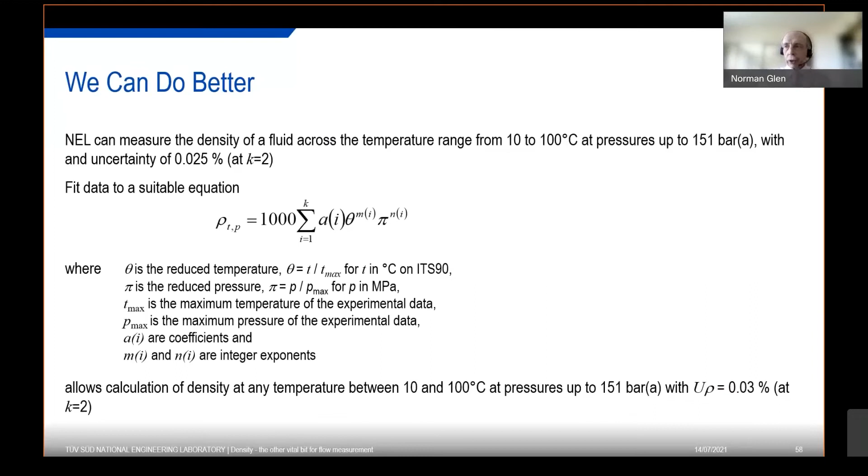Here's an example of an equation that we use. So given a good set of measurements from a primary standard or a reference densitometer, this equation would fit the density with an uncertainty of 0.03% across a fairly wide range, more than enough for EPAT, for example.

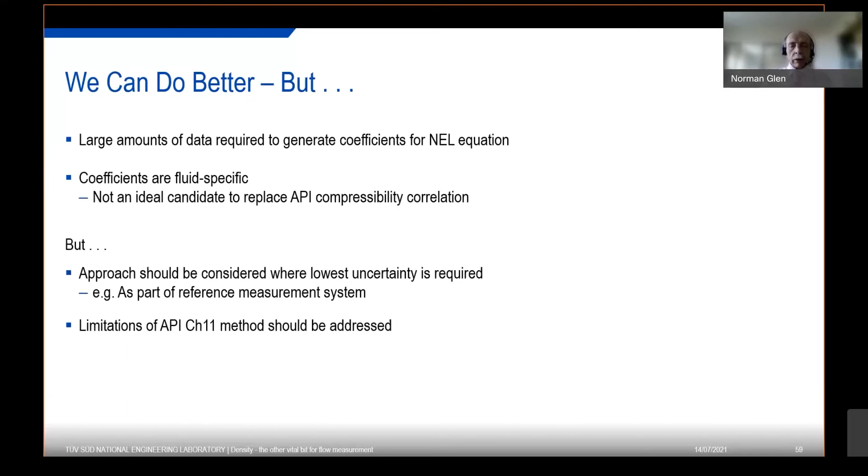So we can do better, but you need a lot of data to generate a fit like that, and the coefficients are fluid specific. So that sort of equation isn't an ideal replacement for the API correlation. It should be considered if you're using it as part of a reference measurement system, as we do on EPAT. Equally, the limitations of the API method should be addressed, and there are techniques that can help there.

So in terms of calculation methods, the API volume correction factors are widely used to convert from measured to reference conditions. They are fit for their original purpose, but not really if you're going to use them as part of a primary reference system. Alternative approaches can provide lower uncertainties.

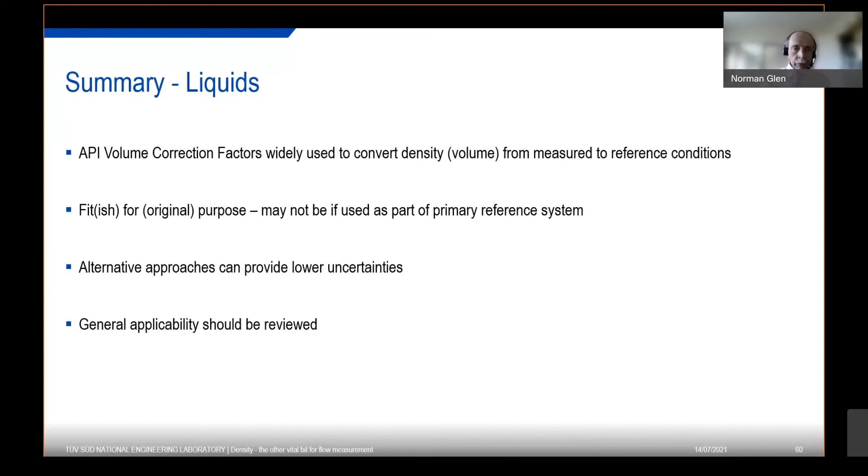What about gases? Well, for pure components or certain mixtures, say pipeline quality natural gas, the easiest and most accurate method is to determine the density, which means measuring the temperature and pressure of the gas, then using an appropriate equation of state. So for pure components, there are a number of packages around.

NEL's PPDS, Thermal Physical Property Data Service package, the NIST REFPROP package - these will give you, depending on the temperature and pressure range and the fluid, the gas, densities with uncertainties of 0.02 to 0.05%, better than you will easily measure.

Natural gas mixtures, AGA8 is the most widely used, or the GERG, both of which will give you uncertainties of 0.1 to 0.5, or possibly better. And they work for a 21 component defined range.

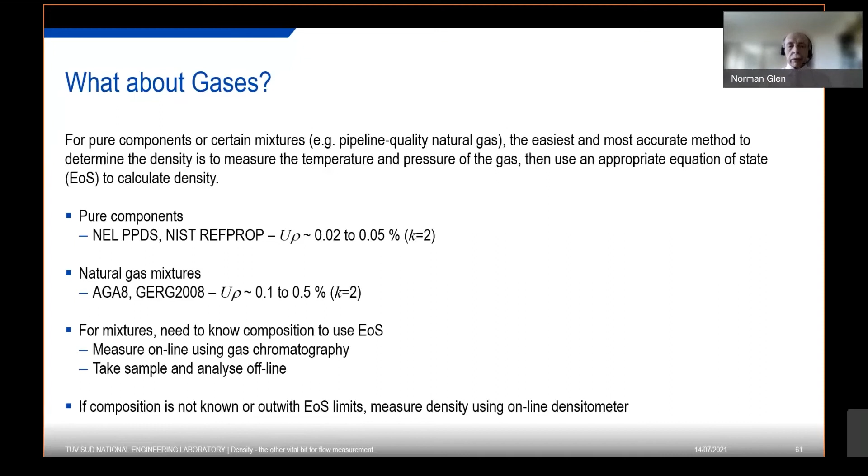But for mixtures, you need to know the composition to be able to use the equation of state, which you can get either by measuring online, using online chromatography, or by taking samples offline and measuring again using a chromatograph. If you don't know the composition, or the composition is outside the limits of the equation of state, then you have to use an online densitometer technique.

There's a lot of interest currently in carbon capture, utilization and storage applications, and in hydrogen for decarbonizing the gas grid. For pure CO2 and pure hydrogen, again, the easiest and most accurate method is to measure temperature and pressure and use an equation of state. For pure CO2, for example, the Span and Wagner equation will give you densities more accurately than anybody but a primary standard laboratory could measure.

However, for carbon capture, utilization and storage, it's unlikely to be pure CO2. There will be contaminants depending on the source of the CO2 and the capture process. In general, these will be low amounts, but even small amounts of certain contaminants can have significant effects. So again, you would need to know the composition, either by measuring it or by knowing from some other method the input compositions.

Similarly, in the gas grid, there's a lot of interest at the moment in looking at blends of hydrogen with natural gas up to 20%. Up to that limit, you don't need to change burners, etc. So there's a certain incentive to go down that route. But again, that means you're having to use equations of state, and composition needs to be known. You've got the advantage in the gas grid systems: you know how much hydrogen you're putting in, so you know what the composition is. But the problem is that equations of state generally don't like hydrogen in mixtures, so they often struggle to give you good results.

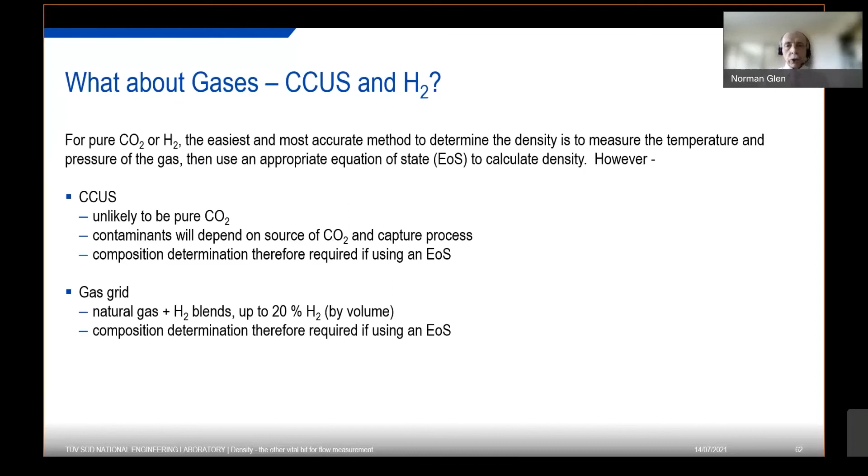Similarly to liquid measurement systems, there are a number of practical considerations which can trip you up if you're not careful. Potential sources of error include problems with the calculation approach if you are using sampling and an equation of state. If, as with liquid systems, you don't get a representative sample, the answer will not be correct. And representative sampling for gas systems, whilst it should be easier than for liquids, can still present challenges.

The use of an inappropriate equation of state is also another concern. Some equations of state are good for some properties, but not for others. And it's not appropriate just to say, I'll always use this equation for all my property calculations, because whilst it might be the best for some, it might struggle for others.

But even if you have used an appropriate equation of state, it may just have limitations for the application you're using it for. Either, as I said, in the case of AGA 8 or GERG, they are limited to a set of 21 components. If you have components in your mixture which are outside, not within that set of 21, the equation will calculate, but it will have some residual error. Similarly, as I mentioned in the previous slide, hydrogen causes problems.

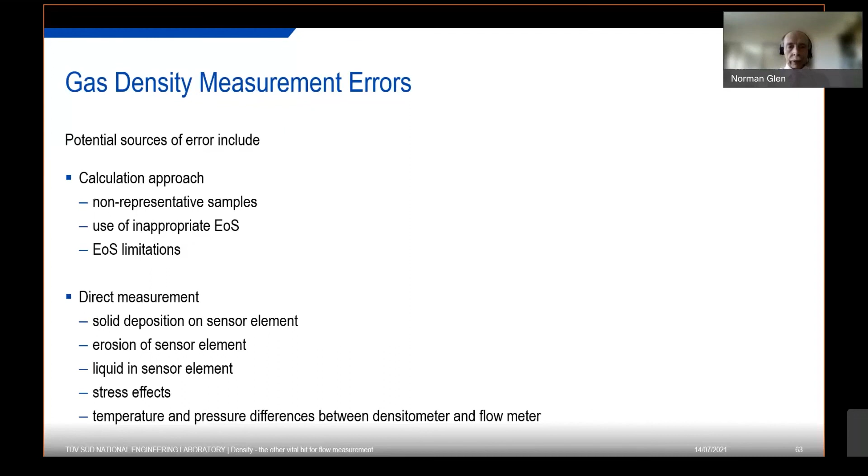So let's summarize. Hopefully, over the past hour or so, we've seen the importance of density for flow measurement systems, starting from this position: because flow measurement is vital throughout process industry and energy production, we need to be able to measure flow accurately. But depending on the technique used, there is often a requirement to convert between mass or volume, and that requires knowledge of the density of the fluid as a function of temperature and pressure. We've looked at a range of density measurement techniques for gases and liquids, with a wide range commercially available.

But again, whichever technique is chosen, appropriate calibration is vital. And calculation methods are also important if you have to express density at alternate conditions, going from measured conditions to reference conditions.

Density is also used, as we said, directly for process control and product quality applications in many systems. So it really is a very fundamental part of the process industry and energy production, primary energy sector.

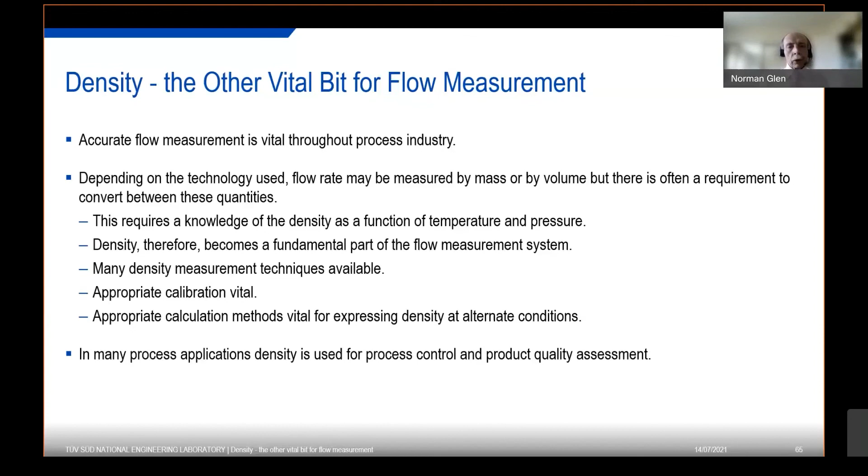And just to put it into context in terms of the national measurement system, density determination essentially sits at the core of all of the capabilities that we have at NEL, which form part of the UK National Flow Measurement Standards facilities. If you look at any of our facilities, we require density.

In the case of our advanced multi-phase facility, for example, there is a separation system which separates the gas phase and the two liquid phases, the oil and water. The liquid phase separation is very good, but it can never be perfect. So we need to account for the small amounts of oil in the water and water in the oil. And we do that through online measurement of the density and offline measurement of the density of the pure fluids, and we can calculate. So density is used there.

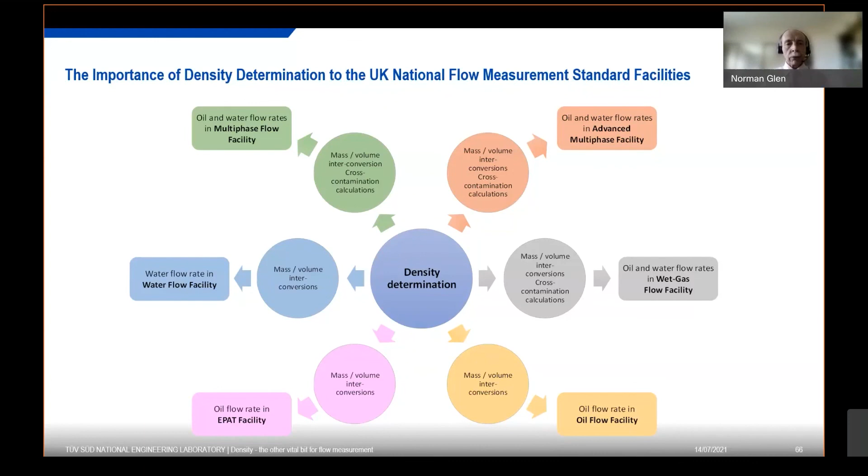EPAT, I've already mentioned, uses a volumetric reference, but it is typically calibrating mass flow meters. So density is used directly there. So density sits at the core of the UK's national flow measurement capabilities. And hopefully that's given you an idea of the importance of density.

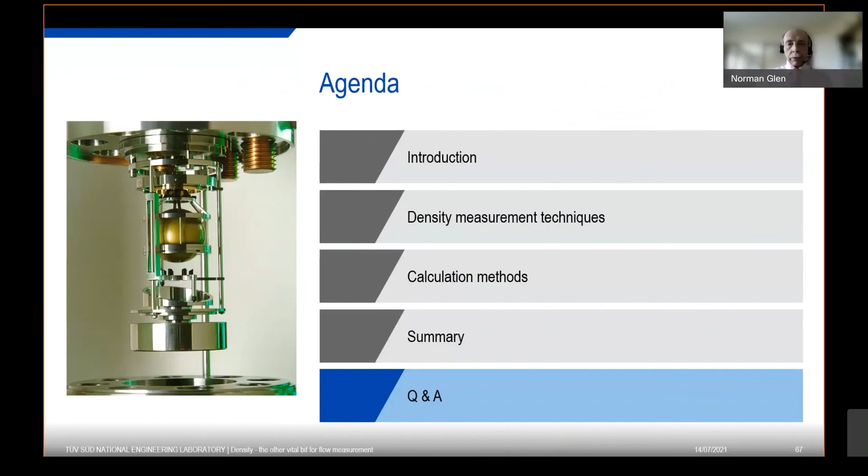So, how good is the density output of a Coriolis meter? Potentially very good. Some of them, depending on the temperature and pressure range and the calibration, you can easily achieve 0.02%, possibly even slightly better. So they are now actually very good on density output.

Okay, well, that's actually another good one. Why do we need density if we're using a Coriolis meter and reporting by mass? That's a good point. If you are only interested in the mass, then you don't, but frequently you do still need to convert. One application, for example, would be shared pipelines. Whilst the allocation is by mass, if you've got a Coriolis, you've got that quantity. The pipeline operator also charges you a tariff based on the volume you're putting through. So you need the volume, so you need the density. So you still need the density output of that Coriolis meter to give you a volumetric flow rate for the tariff for the pipeline. Just as well the Coriolis does both for you.